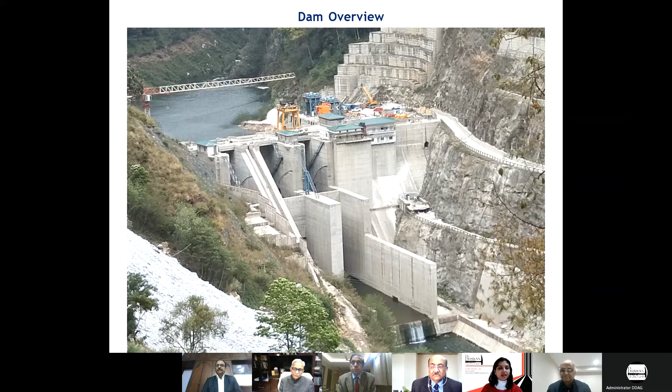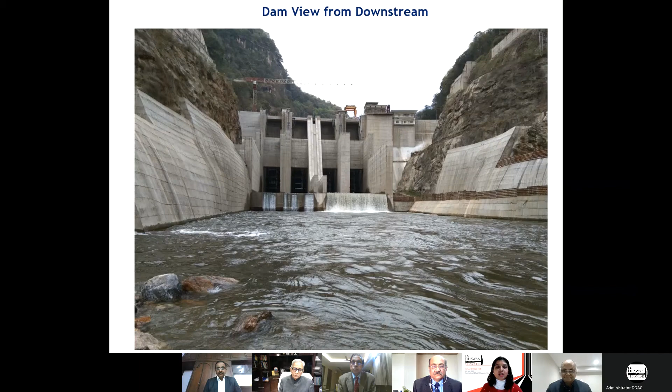Thank you, Mukta. Thank you very much. And to set the ball rolling straight away, I will invite Mishra ji and would like to know from him: we know that this is a mega project, a joint project between the Government of India and Bhutan. So what was the agreement like between these two countries and how are these countries benefited by this project? Mishra ji, please.

Thank you, Deva. I just would like to share with you that the Mangdechhu project came into existence after the bilateral agreement signed between the Government of India and the Royal Government of Bhutan on 30th April 2010. At that point of time, the Foreign Minister of India, Mr. S.M. Krishna, and the then Minister of Economic Affairs Lyonpo Khandu from the Bhutan side signed that agreement. After the signing of this agreement, the process for implementation of the Mangdechhu project started.

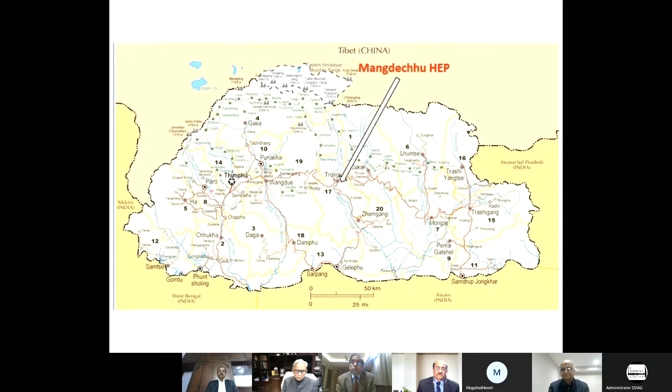In this regard, it is also to be noted that the entire project layout, the entire project's construction was to be planned in a way so that we consume the minimum time for the overall construction of the project and do it as we have committed in the DPR. So I joined the project on 27th August 2010, and thereafter I started building up the team. And this team I could build in a faster manner.

During this period of 1 year, which was given in the DPR, the 1 year was allotted for the development of the access roads and the colonies for the project, which I did. And we awarded the work of the major components like dam, HRT, underground powerhouse, electromechanical works by the 20th March 2012. After the works were awarded, the contractors started mobilizing. If you look at that scenario, everything which we did in the very first year was wonderful.

And from the layout point of view, I would like to share with you that the project has a concrete dam along with the HRT. The dam is 101.5 meter high. Almost half of the height is above the riverbed, half of the depth is below the riverbed. Then a 13.5 kilometer long tunnel. Then after that, there's a surge shaft. Then there is a pressure shaft, and then there is an underground powerhouse. This is the overall layout picture. Mr. Deva, would you like to ask me the next question?

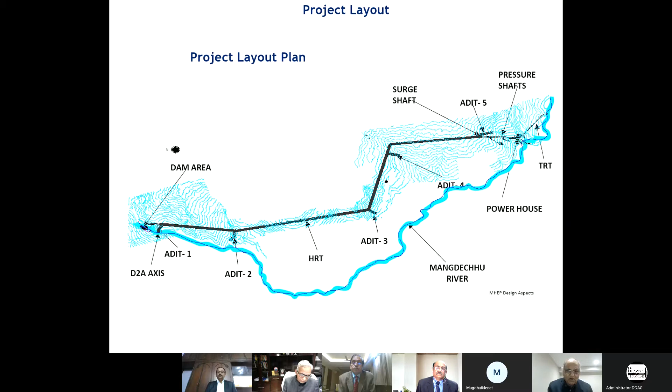Thank you very much. I think we have got the basic idea about the project. And now I can turn to Imran ji. Because this is one of those mega projects in the Himalayas, the geology is very complex. So we would like to know from him, what was the geology like in the context of the geotectonics of Bhutan, and what were the main challenges in carrying out the geological investigations like mapping and other investigations? Mr. Imran, please.

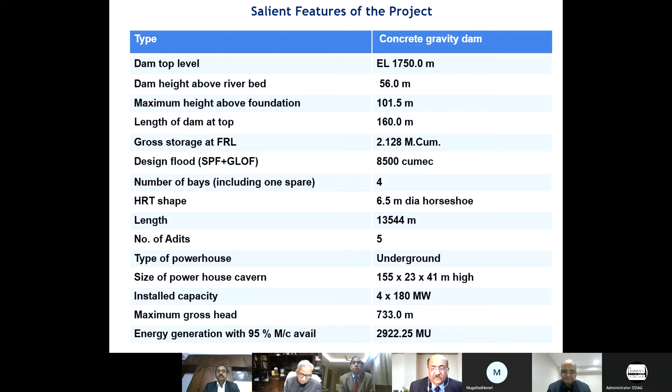So this would make the geology a little bit complex. And then we also had the leucogranite in the project, which is a much younger igneous intrusion. It is only 30 to 10 million years old. And then the rugged terrain in the Himalayas.

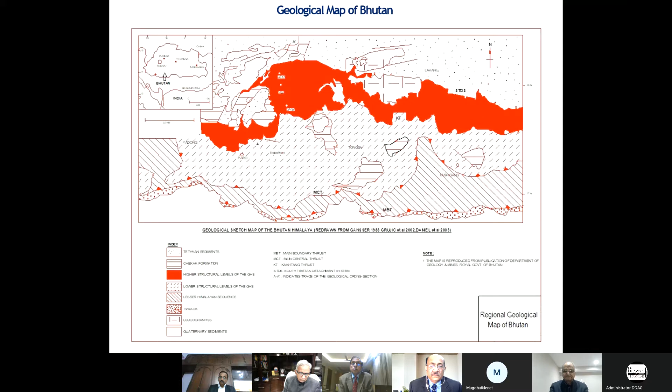Added to this, at the dam site, during the feasibility stage, several alternatives were explored. As many as 6 alternatives were looked at by the consultant at that time, and then they zeroed in on some axis. When NHPC came into the picture to prepare the DPR, we saw that site. One of the sites had a canyon. The bedrock was 70 meters deep over there. Then they came a little bit upstream and selected that axis with about 60 meters of overburden, which was quite high for a 56-meter high dam.

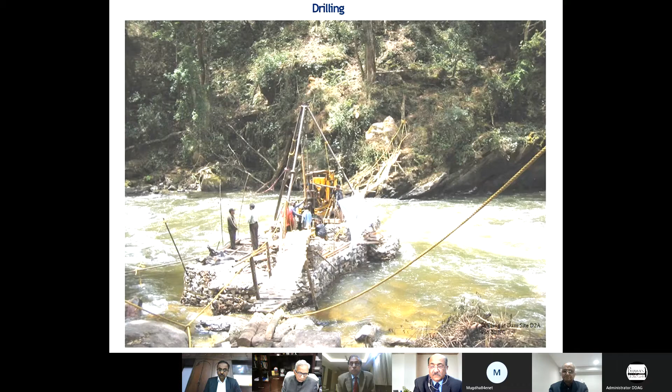But even between the upstream coffer dam, the dam axis, and the downstream coffer dam, there was a substantial variation in depth of bedrock. If it was 50 meters at the upstream coffer dam, coming to the downstream coffer dam it became 70 meters or so.

In the HRT, once again, we had a huge leucogranite outcrop near Thakse village, and it was a challenge how to project that outcrop at the tunnel grade. The regional dips upstream of this outcrop were in the southerly direction, and downstream of this outcrop there was another formation, the Chekha Formation. So gneiss on one side, mica schist and quartzite on another side, and in between the leucogranite.

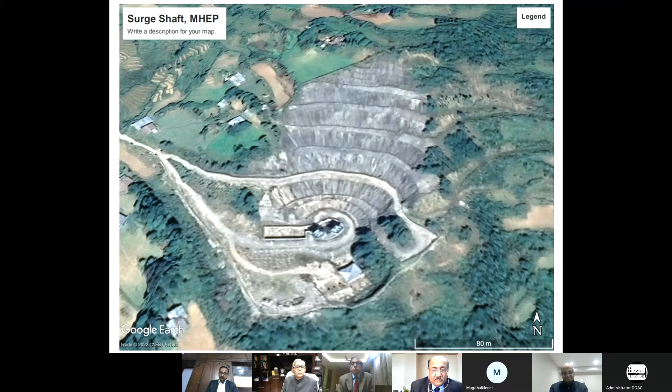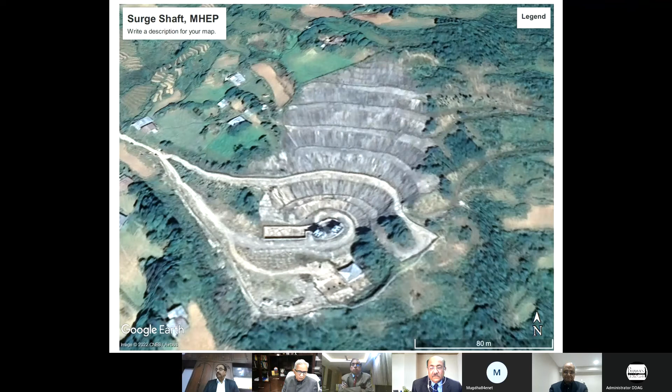Then we had the surge shaft. There was no outcrop in this area. It was full of cultivated land, quite a huge amount of cutting, about 70 meters or so, which was handled either in overburden or in highly weathered and decomposed schist rock, which was quite weak. Even the surge shaft, I will show you a section subsequently. Next, please.

Even the surge shaft had a thick overburden as well as a thick weathered rock profile, so we had to shift the surge shaft sufficiently inside the hill. But this also had very hard intrusions. There you can see overburden, slumped and weathered rock and hard intrusives. So all this made it quite a complicated geological situation, which was handled by the stepped configuration of the pressure shaft.

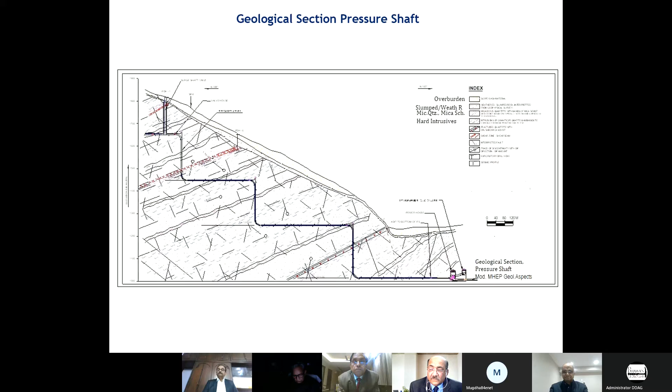And then coming to the powerhouse, the powerhouse was placed in hard quartzite. Very little space over here for the pothead yard. The pothead yard excavation height was 120 meters, and with careful excavation and a well-designed support, this is one of the most attractive engineering achievements of the project, I should say, because when you have in quartzites valley-dipping foliations at a very adverse angle of 40 degrees, it makes the situation very, very difficult. So this is a very deep cutting to create the space for the pothead yard, which has been made without any collapse.

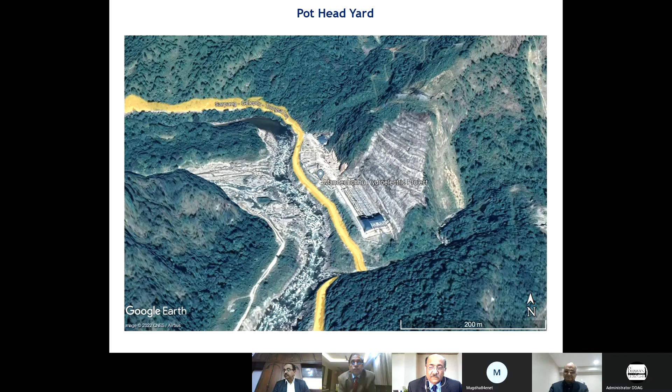So that way Mangdechhu had plenty of geological challenges, which were handled by adequate provisions in design and immaculate execution by the Mangdechhu Project Authority.

Thank you, Imran. Thank you very much. That was lovely. I will just ask you one question: this HRT was more than 13 kilometers long. So what was the worst underground excavation problem you experienced here, in brief? Yeah, a very interesting question.

In the downstream portion of the HRT, as we saw in the case of the surge shaft, the rock was extremely weak mica schist, and the entire area had cultivated land on top. It was water charged also, so plenty of sheared stuff over there. From one of the downstream faces, there was a substantial amount of poor rock.

But one very interesting thing I would like to share with you here: I was looking at one of the papers written by A K Mishra, the MD who is with us, and he pointed out that almost 3.8 kilometers was poor rock area. And when I saw the DPR, we estimated in the entire HRT 21% of class 4 and 5% of class 5, which is 26% of poor rock.

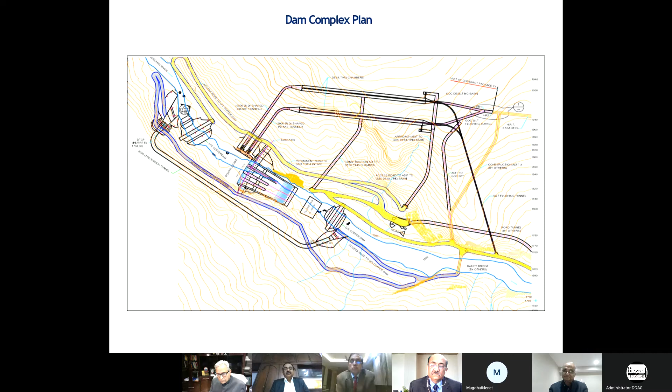Now, before that, let me just explain this longitudinal section of the reservoir. If you see this river, it's a very steep river, and the FRL is fixed by the physical and the geographical constraints which we have. And the MDDL is worked out, like what kind of peaking hours you want and can be afforded, and minimum are 4 hours. So MDDL gets fixed.

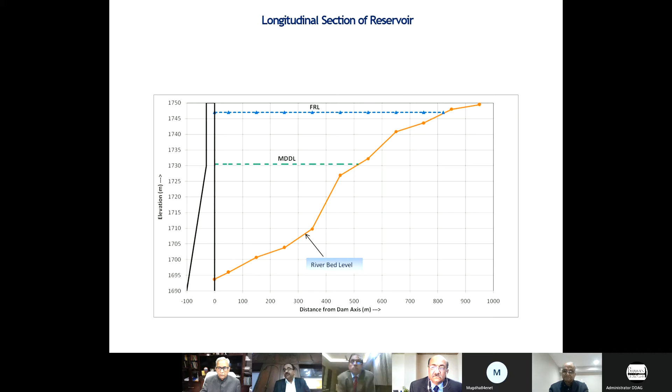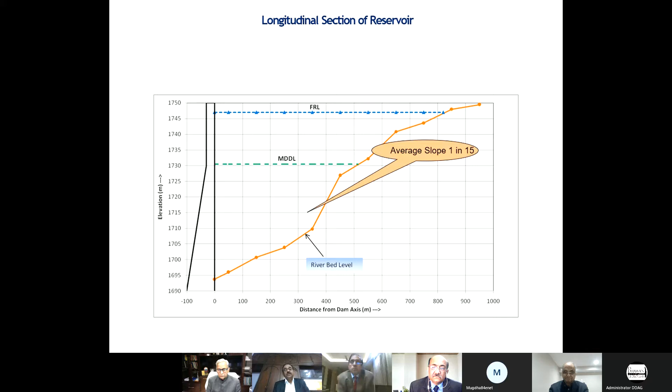But the real crux comes: where do you place your intake and where do you place your crest of the spillway so that there's no sedimentation, because Mangdechhu Reservoir is a very small reservoir. And average slope you can see is 1 in 15, which is a very, very steep river. And this presented to us a lot of problems, as we shall see further. Next, please.

And now placement of the intake. This was the first time in NHPC also; we have never done it earlier. Before deciding upon the invert level of the intake, we actually carried out a sedimentation simulation, which is only a numerical modeling by MIKE 11. And we decided upon the level of 1720 after running it for about 11 years.

As you can see on the right side, there's a legend here. For 1 year, what was the profile? Second year, what is the profile? So finally, we found that at about 1720, this gets stabilized. So we decided this is the level going to be. And now we had to juggle between this particular level and the crest of the spillway, which was to be decided by the discharging capacity.

And in between, one event happened wherein on the downstream side, there was a GLOF-like event in Vachechu, that actually set the alarm bells ringing, and we decided we had to really think very hard. Should we raise our crest level of the spillway to afford good hydraulic conditions or not? In the model studies at CWPRS, a lot of permutations had been done, and CWPRS was saying that on the downstream side the flow conditions are not very good, so you should try to raise the crest. But we said if we raise the crest, our intake is certainly going to get choked.

So this was a tool which we used here, and fortunately 1720 level was decided, and now the project is performing very well. And I checked up with the MHPA later on also; sedimentation has not reached beyond those levels so far. Yes, please, next slide.

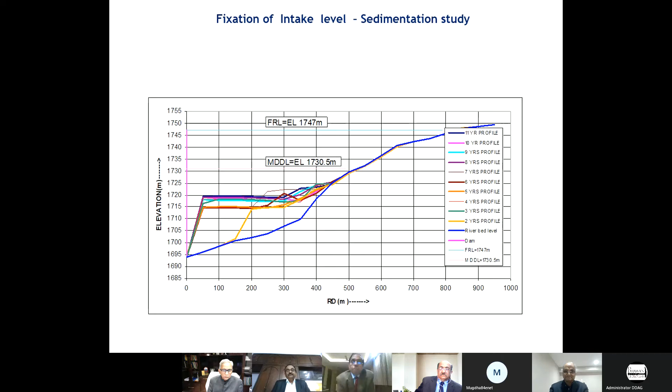Now this is the intake structure which was decided to be at 1720. It was supposed to be excavated to riverbed level and then raised from there. However, we found a rock ledge here, and the issue was whether to place the intake here or not. But finally, considering that 50,000 cubic meters of concrete could be saved, we said, okay, let us put it on the ledge only, and then we have to protect the ledge somehow.

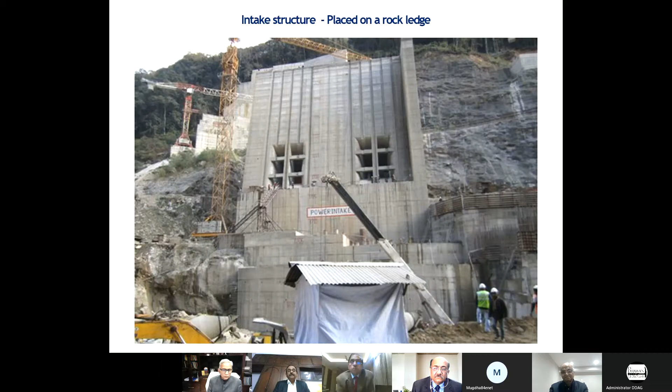When we excavated this area, we found that the rock at the intake toe was not quite competent. So we had to give a special kind of cladding here with long cable anchors to hold it in place. Next, please. Yes.

This was so ferocious a flow that CWPRS was not able to decide upon the levels and how to hold this particular structure of intake, which we have placed on the ledge, in place. So that is why we decided to give a very thick cladding supported with very long cable anchors.

So finally, after a number of meetings with CWPRS, a number of permutations were made. And finally, we decided that for this particular dam, even though for Himalayan rivers flushing is a norm, it cannot actually be used here like we are doing elsewhere.

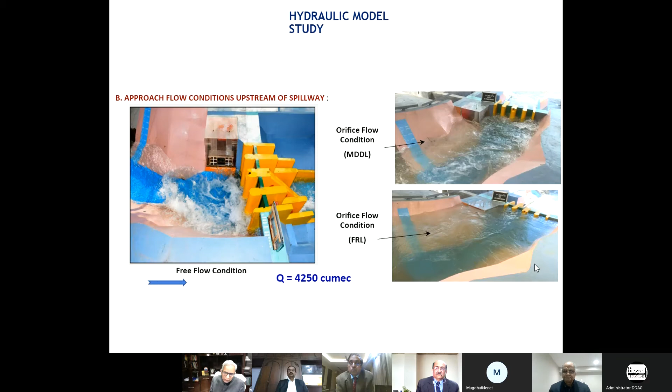For example, we can compare problem to problem. As Joshi ji also explained, this river gorge had very deep overburden, and in the Higher Himalayas we have found this problem in almost most of the projects. I will compare Dhauliganga. In Dhauliganga, we had a 70-meter thick pile of overburden, riverine sediments. As Mr. Joshi said, previously we could not think of a concrete dam with this kind of overburden thickness, and therefore in Dhauliganga we went for this.

We investigated in the 80s and constructed in the 90s. At that stage, we did not have the courage to go for a concrete dam, although it was originally proposed by the Swedish in the original DPR. So here now, with advancement of technology, with the availability of cut-off walls, because they provided a cut-off wall for controlling seepage under the upstream coffer dam. So this was a big challenge if we compare with other projects.

And you see, no project in the Himalayas is simple. Many times people think that because this project has been commissioned well in time, almost matching the schedules, this was a simple project. This is not so. Mangdechhu had its own share of problems. Mr. Imran Sayeed has touched almost all the problems, so I will not go into detail of that. But I'll certainly say that construction of the HRT under 1 kilometer superincumbent cover was another challenge. And that too in the downstream portion of the HRT, we had very weak rocks.